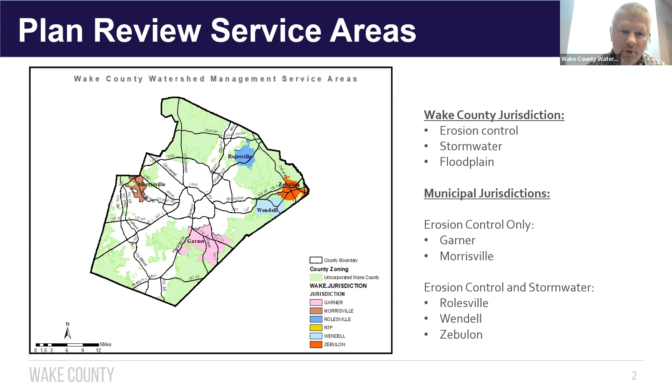Again, I'm Barney Blackburn. I've been with the county a little over 6 years now, with a couple of breaks over those 6 years. I'm the plan review team lead for 4 plan reviewers now, and we'll introduce those folks shortly. I'm responsible for Wake County construction plan reviews for subdivisions and non-residential sites. I'm the town of Wendell contact, and typically the primary reviewer for town of Wendell development plans. I've also been the Swift Creek contact for many years.

Just a little bit of background on me: I spent 16 years with DOT, about 18 months with AECOM consulting firm, and then with another firm. I also worked with the town of Fuquay-Varina.

Next we have Shawn Springer. He's been with the county several years. Shawn, if you want to wave hi to everyone. Thank you, Shawn. Shawn's been with the county several years, and he's done a lot of plan review, more than I have with the county.

He's the Falls Lake contact and typically the primary reviewer up that way. He also has experience with Jordan Lake and RTP sites in the western part of the county, but he's also available to review construction plans for any of the Wake County jurisdictional areas for subdivisions and commercial sites. He's also reviewed a lot of construction plans in the Morrisville area. He and Javon DePani are splitting duties in Morrisville, so you may see Shawn or Javon's name on review checklists.

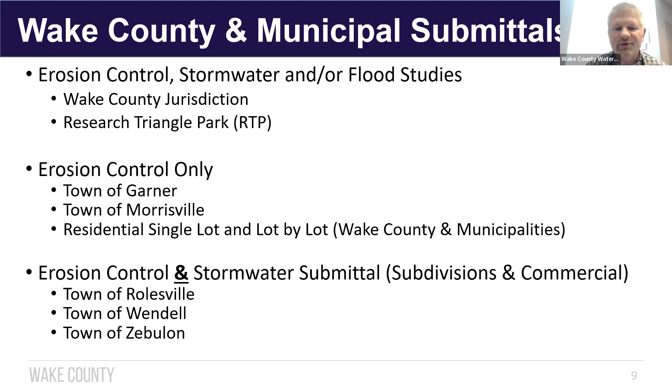Floodplain and flood regulations in these municipalities are left with the municipalities. They have jurisdiction over those. So just keep that in mind. We do not have flood jurisdiction in the municipalities.

Okay, so required forms for the submittals. You either want to submit the joint construction application, which I have a link to that in the presentation, or an individual lot application if it's a single lot. Both of those links are there at the top.

For erosion control submittals, we do require financial responsibility ownership form to be completed, signed, and notarized. That's just for erosion control submittals. And then we have just added a signature authority form. If you need a signature authority, we have a template on our website now, and it's available in the link here under the FRO. Notarized consent letters, we'll talk about that in the next couple of slides.

The notarized consent letter, we have a template for that now on our website, and those are going to be for properties that the developer does not own. We need a consent letter from that landowner to give that developer permission to permit and to submit an erosion control plan to the county.

Applicable submittal checklist. Typically, we like to see those. Those are to help you all more so than to help us. Those are available on our website, and we're in the process of updating those checklists. So you should have the latest and greatest of those available soon.

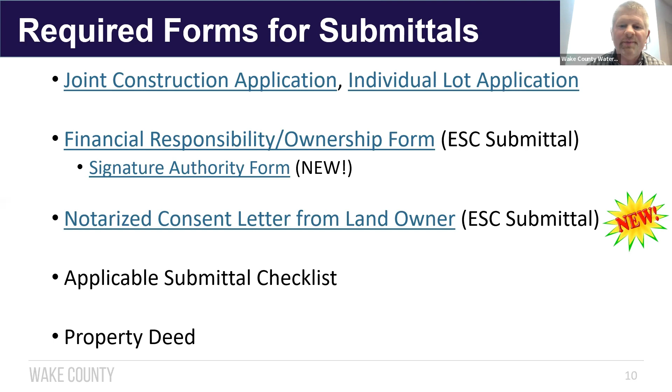And then something new that the state has pushed local programs on recently is the property deed. We may not have requested that in the past, but we're going to start requesting those in the future. So just keep that in mind. We'll need those property deeds for y'all.

So for landowner notarized consent letter, we get a lot of questions on this. You may see this note on our review checklist: developer, if they don't own the property, they'll need to submit this consent letter from the landowner granting them permission to permit and construct on their land.

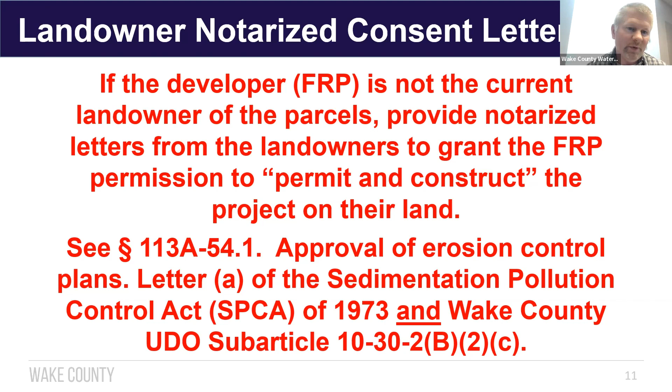There's two areas where this shows up, and one is in the Sediment Law, SPCA, and in our Wake County Unified Development Ordinance. I've got excerpts of those in the next couple of slides here. It's highlighted in SPCA here. And then in our Wake County UDO, Article 10-30-2, here in item C, it talks about that notarized consent letter. So these are items that have always been in the law and our ordinance, and we're going to continue to look for these on the submittals.

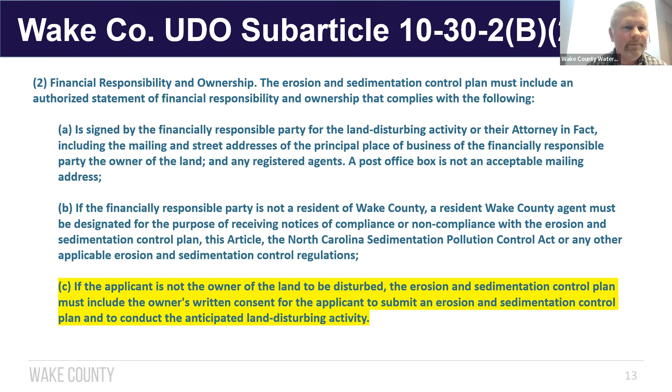Okay, so required maps: we want the USGS topographical map with the project limits delineated in color. Keep that in mind. Black and white copies just don't show enough clarity. And then the Wake County Soil Survey map from the 1970 manuscript, we'd like to have that in color too.

A lot of folks have difficulty finding the soil survey map. Recently NCDEQ has offered a website for the USGS and soil survey map layers. I've provided a link here that you all can use in the future - it's a one-stop shop for both maps. You can toggle the layers on and off, enter in your address for the site, it drops a marker on the website, and then you can print out that area to submit.

For the web soil survey, a lot of folks submit the NRCS web soil survey map to us as their soil survey map. Just remember, the web soil survey is mostly for hydric soil delineations only - it's not what we're looking for. The soil survey map from the county's 1970 manuscript is what we want because drainage features will show up on it that are not present on the web soil survey. That's what we're looking for on that 1970 manuscript map.

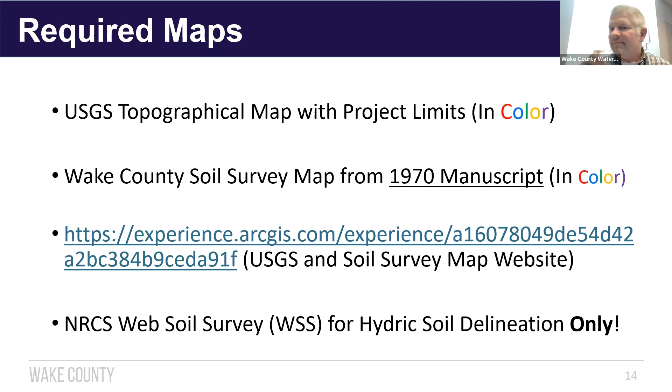Okay, so we're going to dive into erosion sediment control plans here. We get a lot of plans that have a preliminary seal on them, and our checklist does require seal, sign, and date of all the plan sheets. We are going to start requesting that even the initial submittal to us be sealed, signed, and dated. Keep that in mind - we want an official submittal to us, which is one reason why we're requiring this for our review.

Also, we want to make sure you all include an existing conditions plan sheet too, just so we can see the environmental features and existing contours without build out conditions or without erosion sediment control measures on it. This helps us get a general view of the site before we start diving into the specific plan sheets.

A new requirement, which is also going to be in our new stormwater manual: we're going to start asking for a minimum of 3 phases for erosion sediment control. Phase 1 is going to show limits of disturbance only, just to install those perimeter erosion sediment control measures. For phase 2, you will expand the LOD for grading the remainder of the site - that's a little different than what maybe you all submitted in the past. Phase 3 will be the final grade build out conditions. So we're going to start looking for these 3 phases minimum for your erosion sediment control design.

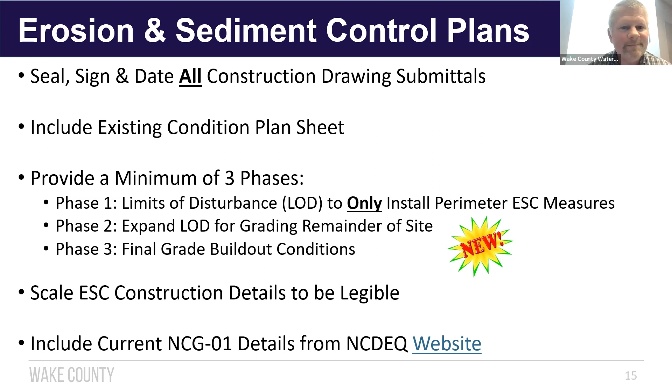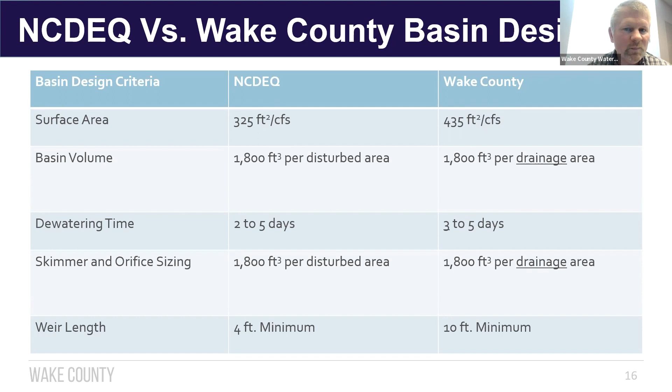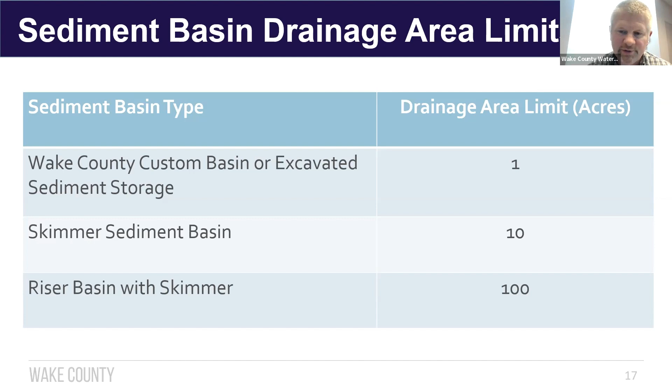Regarding drainage area limits, we see this a lot. If you're using a Wake County custom basin, an excavated sediment storage, or a sediment trap, your drainage area to those devices should be 1 acre or less. For skimmer basin designs, your drainage area should be 10 acres, and that's just with the skimmer outlet. Once you have that riser with the skimmer, your permanent stormwater devices have a drainage area limit up to 100 acres, so we'll be checking for that. Make sure you're not sending more than 10 acres to just a temporary skimmer basin.

Here's some basin criteria from our website. I'll note this third item from the top: we use a minimum C factor of 0.5 for areas drained into the basin, and that's for disturbed areas only. If you have offsite areas that are wooded, pasture, or residential, you can use C factors of less than 0.5, but it needs to be a weighted number still with your disturbed area or any impervious areas drained into your sediment basin. One main thing in the middle of this slide is our Wake County hybrid sediment basin design spreadsheet. It's basically a model of the state's sediment basin design spreadsheet, except we modified it to our design criteria, and this is one location where you can download it.

I know a lot of you use the hybrid basin spreadsheet, which is great, that's what it's there for. But some of you have your own nice spreadsheets too, so just make sure you revise your own spreadsheets to include our design data. We also have sizing the weir information here at the bottom of that web page.

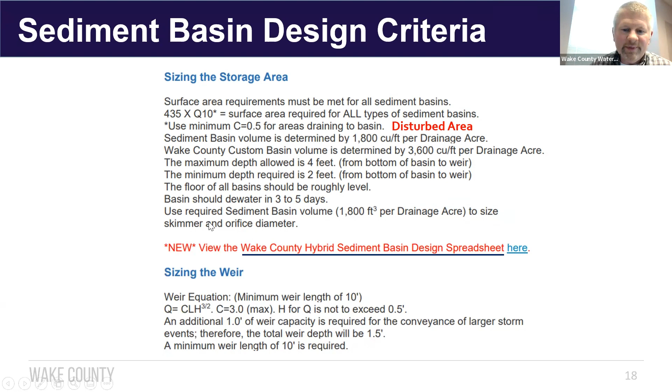Okay, just some sediment basin guidance that we've seen. Here's a link to our hybrid sediment basin design spreadsheet again. We would like for you all to show the skimmer attached to the permanent riser for all phases of your erosion control plan sheets. As designers, we have a lot of power with the erosion control design, but unfortunately we don't have the authority to tell the contractor when to remove the riser and baffles from those stormwater ponds. That's up to our developer and field staff to coordinate, so just keep showing those through all phases on your basins.

Another reminder is to include a pad and a label for the filter bag for maintenance and closeout. That's a requirement of the NCG01 general construction permit from the state, so that's a common comment I make on my reviews. Lastly, just like the skimmer, we want you all to include the porous baffles in all phases on those sediment basins.

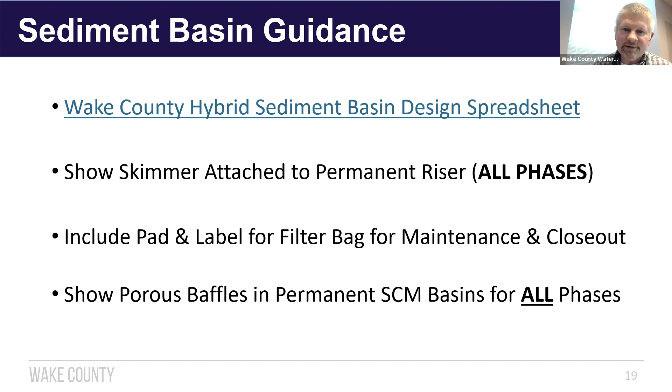Here's an example, a good example of a final grade sediment basin, where you've got the forebay shown, the permanent pipe coming in from the inlet at the bottom. You've got 3 baffles shown across the main cell of this basin. You've got the skimmer shown attached to the riser still, proposed contours with contour labels, and perimeter silt fence.

One note I'd like to make is you want to make sure your baffle line style is different from your silt fence line style, as in this case. You don't want to use the same line style for your baffles and your silt fence, because otherwise the contractor is going to install silt fence for baffles or vice versa. So make sure it's a distinguished line style.

There's silt fence outlets at the outlet of the riser barrel and the emergency spillway, as you can see on the upper left. I did add, this was an older plan, so I added the filter bag for maintenance and closeout, just as an example location of where that might be on your plan and how to label that. You see a little blue square at the top of the sheet on the perimeter of that sediment basin. We want those shown on all phases of your erosion control design as well.

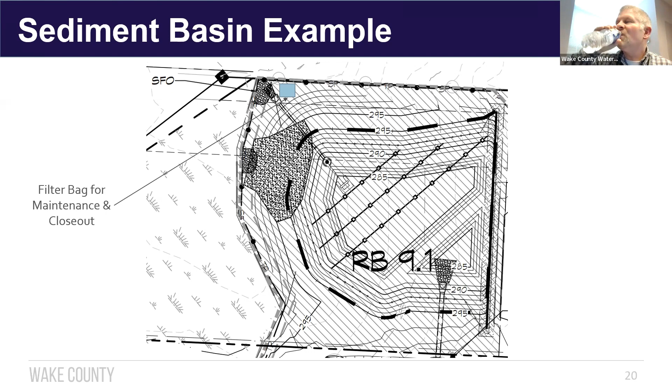Okay, next, stream crossings. We're going to cover a couple of items here. Remember to design the 4-corner sediment storage approach, and I have a slide for that next.

You'll also want to include a detailed construction sequence to manage the stream flow during the installation of a culvert or culverts for your site. We want to keep that stream flowing and clean throughout the construction process.

One comment I often make is to provide those applicable stream management details: impervious dikes, your filter bag, pump around. We are beginning to request that you size the pump for a pump around operation, sized to convey the 2-year peak flow. The 2-year storm is typically the standard for temporary stream crossings and pump arounds. If you have a temporary diversion equipment crossing, designing it for the 2-year storm is sufficient.

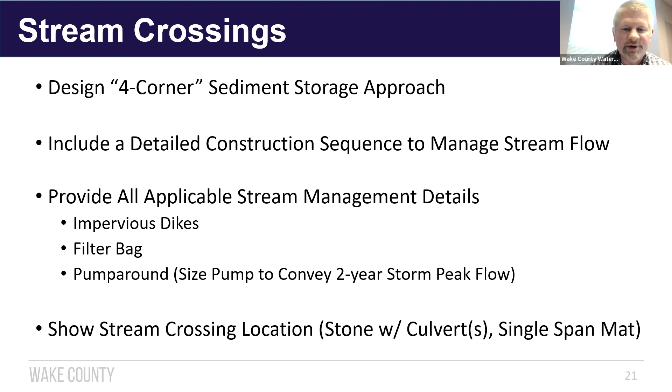If there's a need to cross the stream with equipment, we want you to show that stream crossing location on your plan sheets. That can either be our standard stone with culverts detail we have on our website, or there's also a single span, I call it a mat, but it should be a timber mat crossing detail. We don't have it on our website just yet, but we're looking to add that in the future.

Here's the 4 corners stream protection, a diagram of what that looks like. You've got examples here of what you want to protect the stream with: silt fencing, a diversion channel, or an earthen berm, and you use those measures to divert the runoff to these storage devices. It can be either a rock check dam, a sediment trap with rock dam, a skimmer basin, or your permanent pond with the skimmer there to help protect the stream and provide that sediment storage for keeping sediment out of the stream.

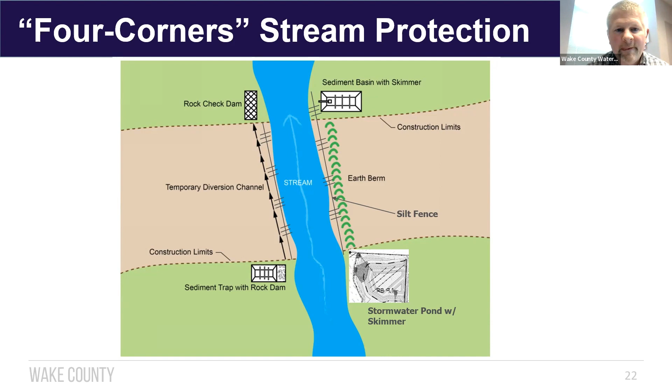When you're placing stone in a temporary culvert in a stream channel, you've got to recover that stone out of the channel, and that can disturb the stream banks unnecessarily. So if you think you can span the stream with just a single span crossing, this is the detail we'd like for you to use.

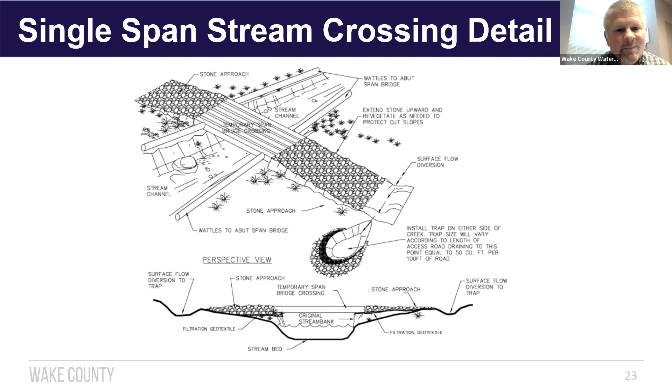Okay, we're jumping right ahead to stormwater. For stormwater management submittal to us for Wake County jurisdiction, you will have to complete and submit the Wake County Hybrid Stormwater Tool. The Municipal Stormwater Tool is for municipalities of Rolesville, Wendell, and Zebulon. So just make sure you distinguish the tool from each, for the municipalities versus Wake County.

The provided tool is going to help you provide the target curve number volume. It applies to subdivisions only for Wake County jurisdictions. We want you to treat the impervious surfaces with the SCMs to the maximum extent practical, and you can utilize disconnected impervious credit provided within the Wake County Stormwater Hybrid tool. This is for drainage areas with less than 30% impervious, and you'll see that note on the DA worksheets.

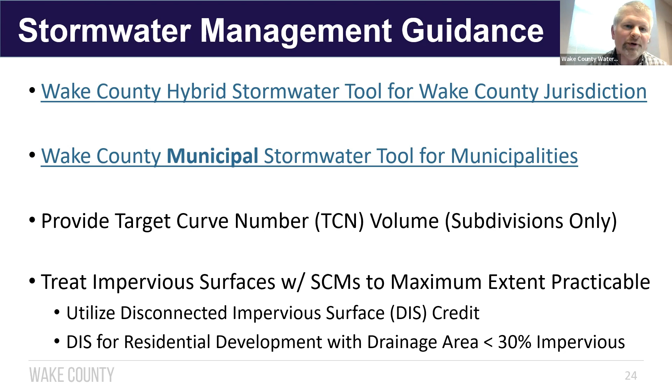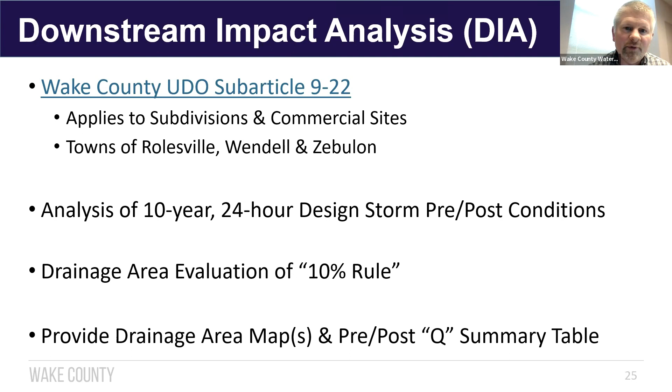Downstream impact analysis, something new we added to Article 9-22 several years ago. It applies to subdivisions, commercial sites, and it's also in the towns of Rolesville, Wendell, and Zebulon stormwater ordinance. It's an analysis of the 10-year, 24-hour design storm for pre and post conditions, and a 10% rule drainage area evaluation that you need to provide with that submittal. We also want you to provide drainage area maps and a pre-post Q flow summary table, among other items required for this DIA submittal to the county.

And here's an example. It's going to be in our stormwater manual. So, if you'll pardon me, I'm going to read straight from this example to you all, so I don't get this messed up.

Site A is at the northeastern part of the slide. Site A is a 10-acre development which discharges to a tributary. The 10% point would be the point at which the total drainage area, which includes the project, is 100 acres. This will be located somewhere between the 80 and the 120-acre junction points of the tributary.

So in this case, the downstream analysis would need to end at the junction labeled 120 acres, which is the closest junction past the 10% point. The 10% rule comparison points would include the site outlet, the 40-acre junction, 80-acre junction, and 120-acre junction. That's an example of Site A.

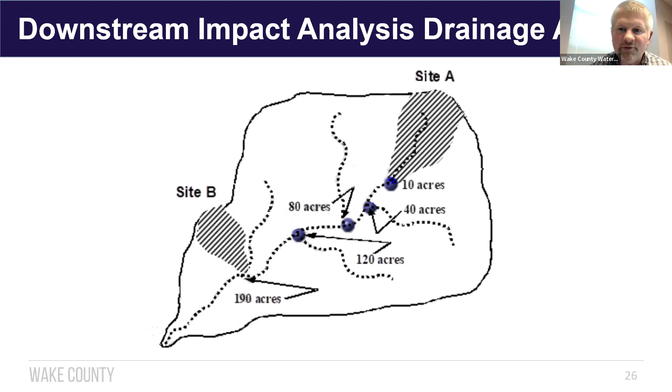Site B is another example that will be provided in our stormwater manual, and we can provide this example to you all if needed after we've done our initial review.

So, SCM placement and easements. SCMs are required to be placed in open space now in accordance with our ordinance. They're no longer allowed to be placed on individual lots for regular subdivisions. Now single lot permitting is a different story.

We do want 20 feet of access easement to those SCMs, and that can be split on property lines, 10 feet on each side of that residential property line. And then we want 10 feet of maintenance access from the toe of the embankment of the pond for future maintenance that the HOA and HOA's contractor may have to do to the embankment.

And then lastly, avoid placement on hydric soils if feasible. If you have to place embankment on hydric soils, we typically will ask for armoring the toe of the embankment with riprap.

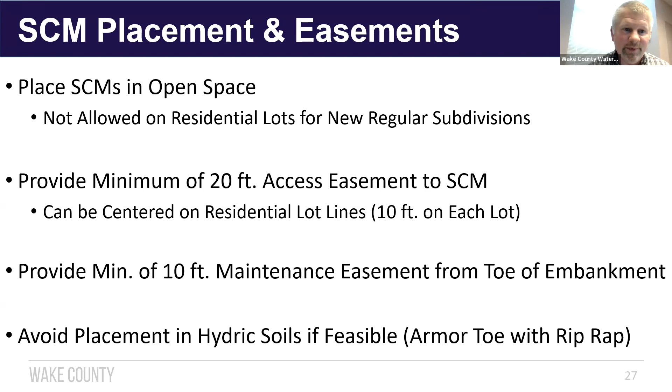Just some design reminders for SCMs. We do follow the MDC guidelines from the NCDEQ website. Remember to model and show your 1-year, 10-year, and 100-year storms in the profile section of your SCMs. If vegetated shelf is applicable, show that width on your plan view and profile sections, and provide appropriate plants or a plant list for the contractor to choose from.

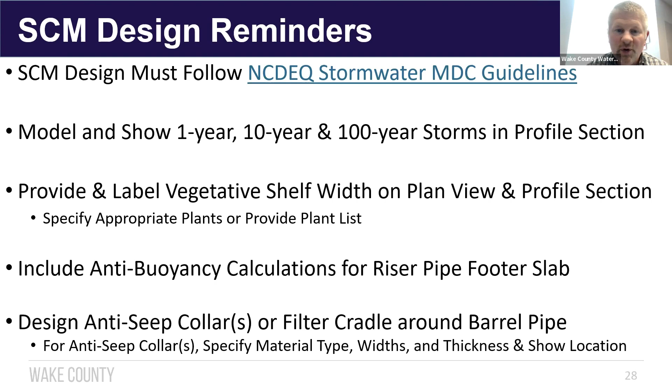Also include anti-buoyancy calculations for the riser pipe footer slab that often get forgotten with submittals. And with that barrel pipe, we want you to design an anti-seep collar or collars—some of you have designed filter cradle sand filter cradles around the barrel pipe, and that's acceptable too. If you design anti-seep collars, provide the location, dimensions, width, material type, and thickness, so developers will know where and what to install.

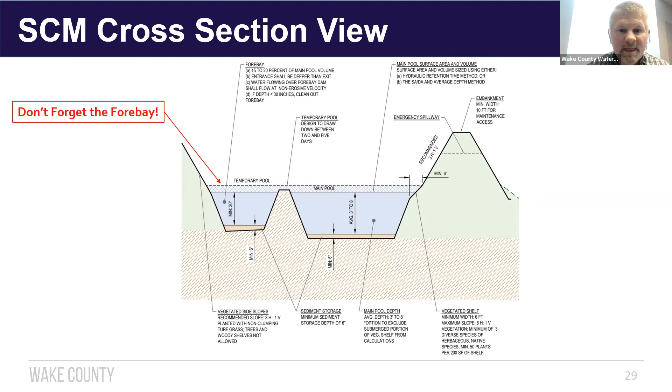Here's an example from the MDC stormwater manual. Added a note here: don't forget the forebay. Wake County's preference is to have a forebay in dry and wet ponds, so make sure you design a forebay for these structures. And then here's another, the outlet structure snapshot.

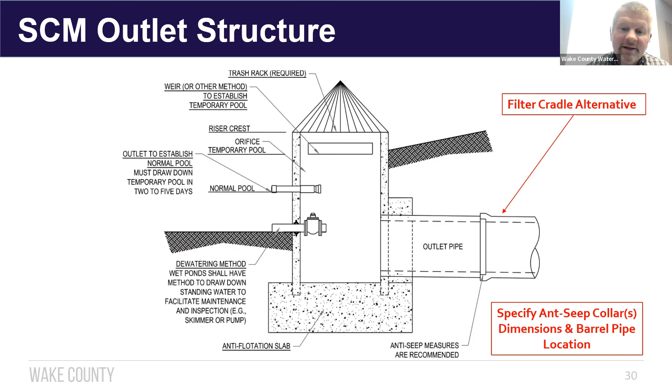So I did mention we're going through a county stormwater manual update. With the update, we're going to update information for subdivisions and single lot stormwater deviations, along with non-residential sites. As I mentioned, the downstream impact analysis is new, and a lot of folks have questions on it, so we're going to provide a step-by-step procedure and example in the manual.

The manual should be available, hopefully, a little later this year. I can't specify a specific date, but it will be available once it goes through. There will be a public review cycle on it. We're wrapping up the draft sections this week, as a matter of fact, so it'll go out for public review and comment shortly.

We are adding an erosion sediment control section to the manual, which is not in the current manual, and a floodplain management section, which will also be a new section.

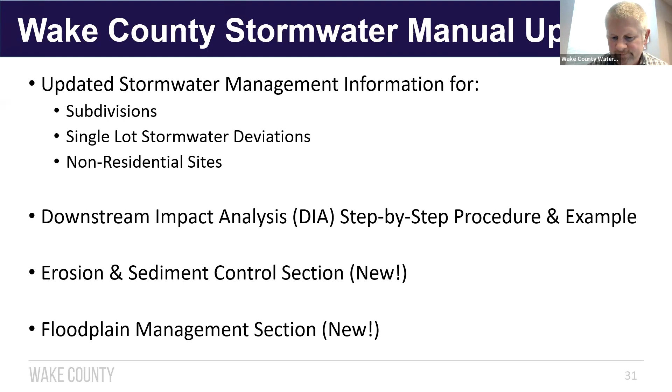Okay, so the Neuse River stormwater rules updates. A lot of you all have heard about these, and one of the major things, requirements for the rules, will be the SNAP tool required for your nutrient loading of nitrogen and phosphorus, and we'll transition to the SNAP tool requirement as we adopt the rules in our ordinance.

One thing being removed from the Neuse River rules is the requirement for pre-post peak flow for the 1-year storm. Wake County is also going to remove that requirement from our stormwater manual and requirements, except for Falls Lake—they have their own Falls Lake rules that include the pre-post peak flow. So we'll have to keep it there until those rules are amended and adopted sometime in the future.

And then we will keep our Wake County target curve number volume requirement for subdivisions only. That'll be a separate spreadsheet, a smaller scale spreadsheet than the hybrid tool or the SNAP tool. So you will have to run two spreadsheets: the SNAP tool for nutrients, and then the target curve number spreadsheet for the target curve number volume.

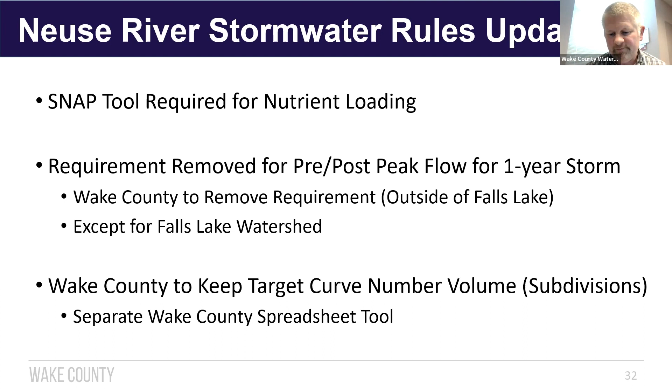Okay, so the implementation schedule: the EMC is going to approve, hopefully approve, our draft stormwater program in May of this year. And then after they approve it, NCDEQ will notify us that they've approved it. Once we get that notification from NCDEQ, we'll have 6 months to adopt and implement the new program, so we'll be on a tight schedule to get that adopted.

Basically it'll be updating Article 9 of the Unified Development Ordinance that we'll revise. Then at some point, the municipalities of Rolesville and Wendell will have to follow a similar process that Wake County will follow with the EMC. I didn't mention Zebulon - Zebulon is not a Neuse River community, so they're exempt from the rules.

Okay, so our last topic here will be for flood studies. The flood studies are applicable to structural fill and culverts and FEMA stream channels for the FEMA floodplain, also in hydric soils for drainage areas of 5 acres or more.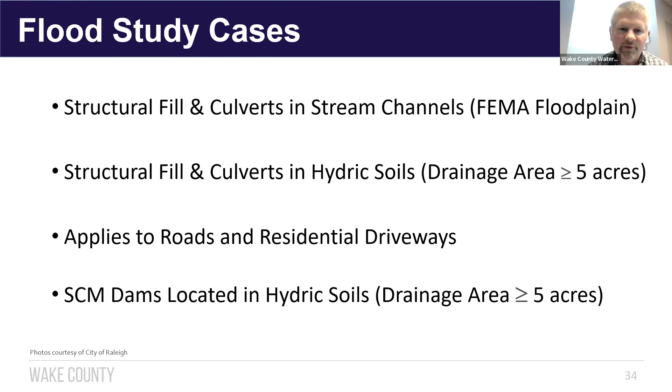So the calculations for flood study: standard for the county is a 10-year storm design, a 25-year design storm for high quality waters, and when there are Wake County water supply watersheds in place. Another calculation we'll be interested in is the 100-year storm backwater and the easement. The easement requirement is the base flood elevation, which is the 100-year backwater elevation plus one foot according to our ordinance. And then there is a balance of cut and fill requirement for the stormwater control measure, dams and embankments.

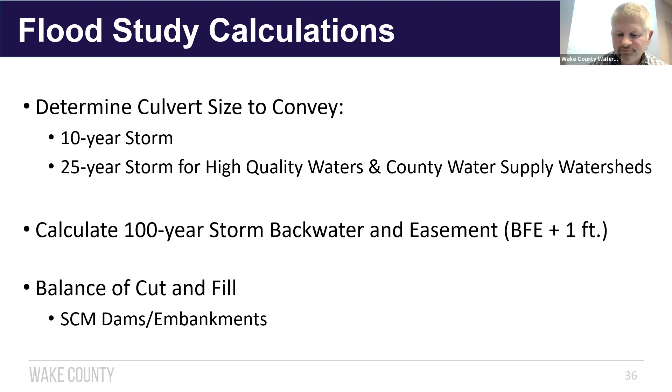So here's where the requirements we're enforcing now for the SCM embankments come from. If you look in Wake County subarticle 14-21-1, it does reference subarticles 14-19 and 14-20, which do require balance of cut and fill, and it's for drainage areas that are 5 acres or greater - that's the trigger for this requirement. So if you can keep your stormwater control measure embankment outside the hydric soils, you're exempt. But if they're in the hydric soils and you've got more than 5 acres draining to this point, we will be adding a comment on our review checklist to submit a flood study.

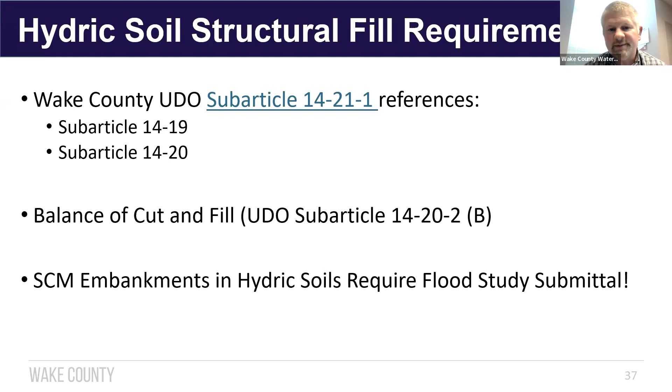So for a minor flood study, these are for drainage areas less than 100 acres. It's a $500 review fee, a 30 calendar day review for us, and then 15 calendar days for each resubmittal. Most hydrologic models are accepted for the minor flood study, and HEC-RAS analysis is not required.

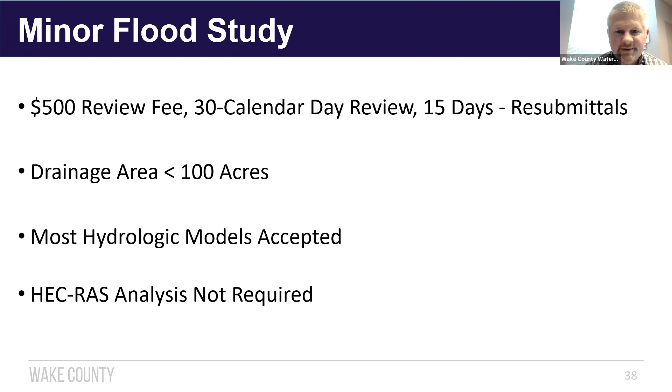And with that, that's the information we wanted to share with you all.